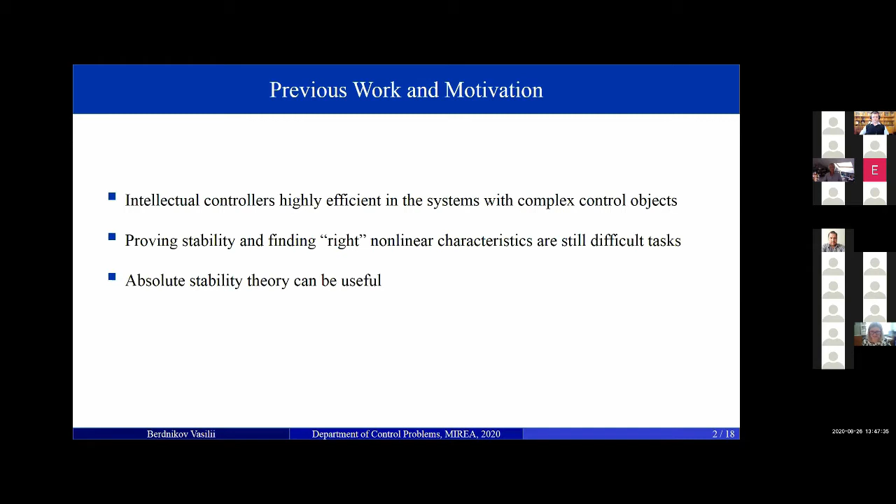However, proving stability and finding parameters in such controllers are still difficult tasks, especially when we talk about parametric disturbance objects, where we can only determine the range of change, but not the exact flow. In this regard, absolute stability theory can be very useful. On the one hand, we can deal with parametric disturbance, and on the other hand, we can find the stability sectors in which we must place our nonlinear characteristics of the intelligent controller.

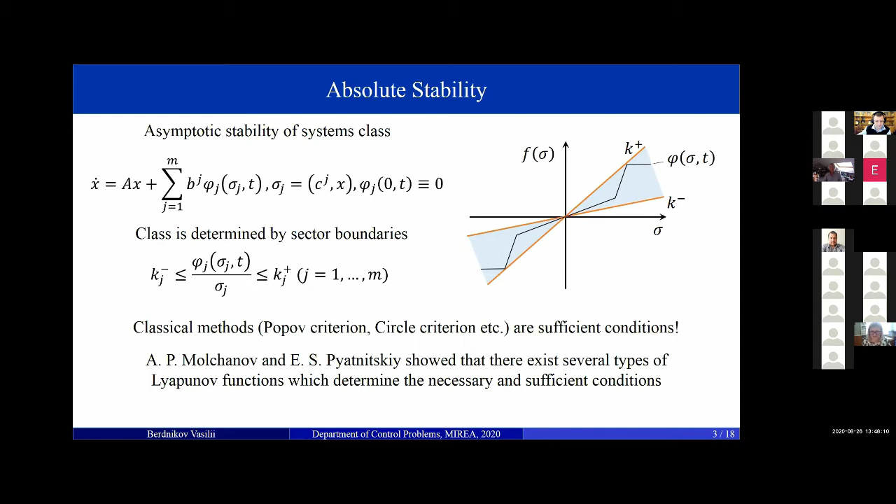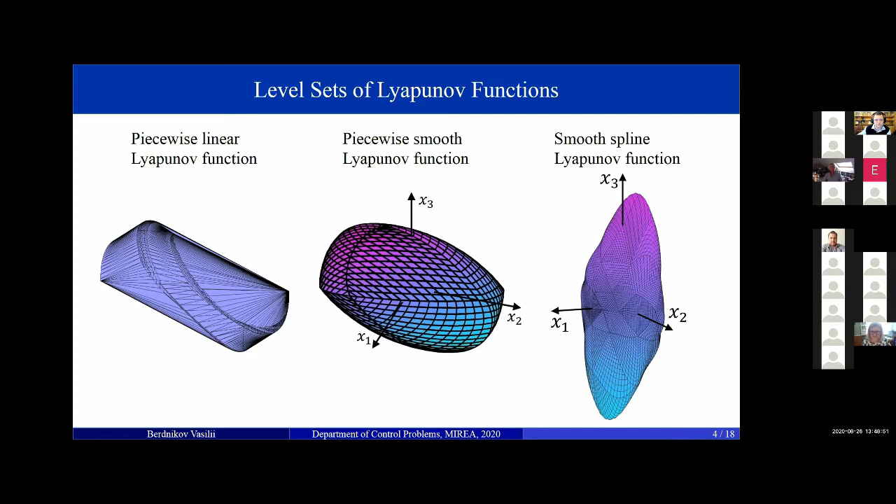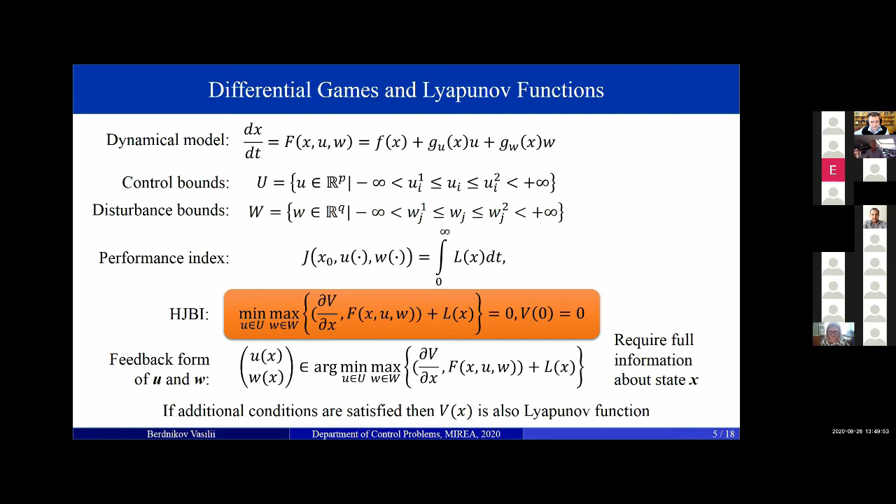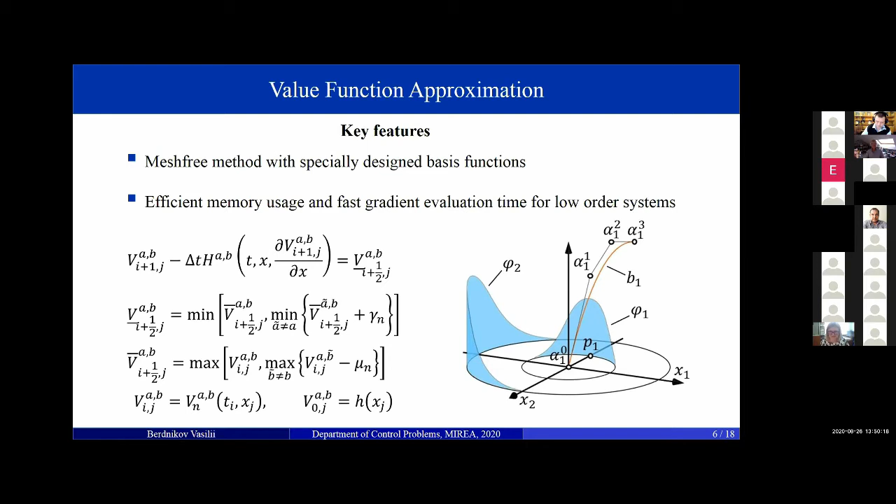That's why we decided to provide our own algorithm of value function approximation. I don't want to go deep inside formulas and backgrounds. I will just note some main features. It is a mesh-free method with specially designed basis functions, and it has efficient memory usage and fast gradient evaluation time for the system, which is very important in real-time applications. So now we can move on.

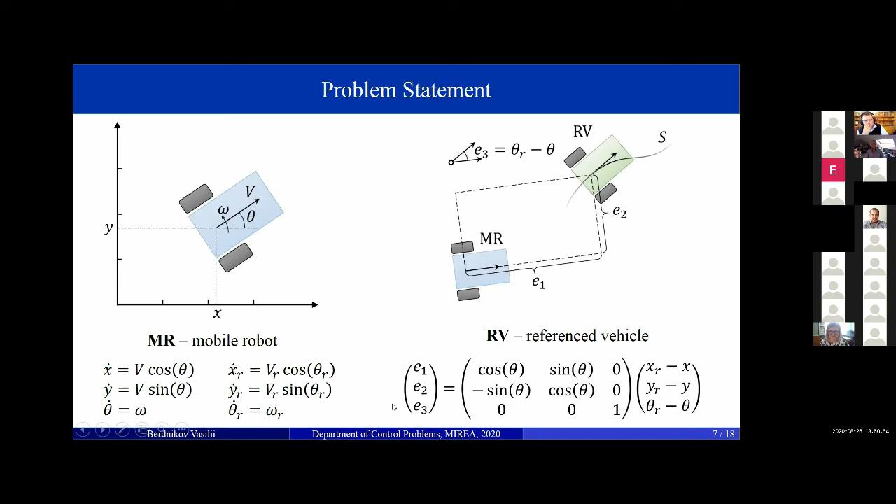In our work, we consider one problem of trajectory tracking, where a reference vehicle implements the ideal movement along some desired trajectory, and the mobile robot tries to minimize the deviation from this movement. On this first stage, we take a very simple model to provide general ideas, and here's the definition of the error vector. After simple calculation, we can show that there exist stabilizing control laws U, assuming that linear and rotation speed are not equal to 0.

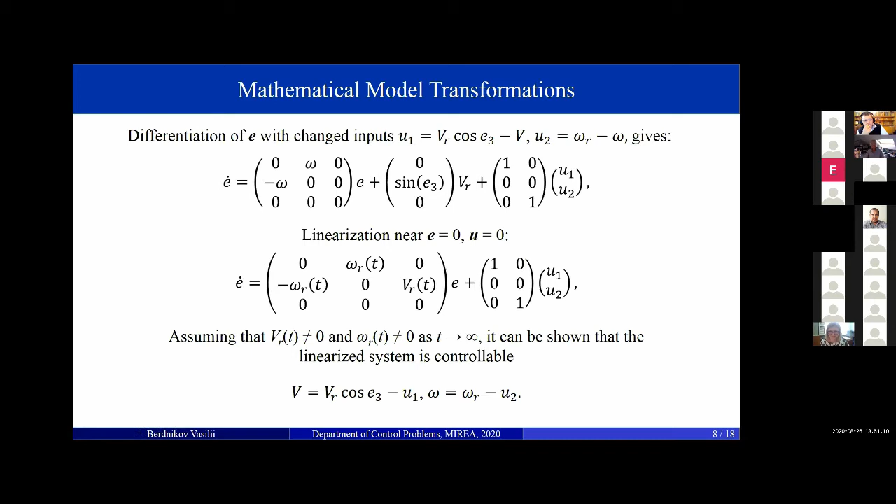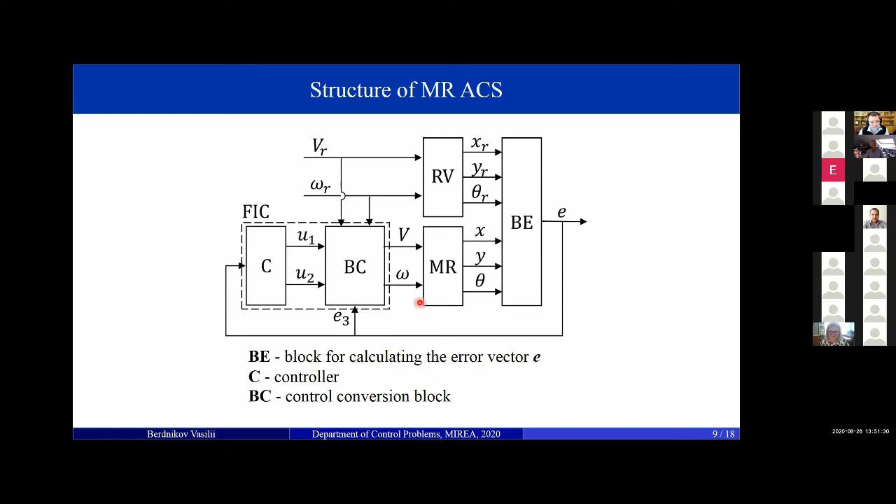Here is the structure of the automatic control system. These blocks compute error vectors, and this is a full information controller, which consists of two parts, the controller itself and the conversion block. And one common way is to choose the control law in the next form.

Instead, we introduce our method. The main idea is that rather than finding the concrete parameters and coefficients, we will determine the boundaries in which coefficients can change. So at this moment, we will think about k as a function of error vector E. And to find concrete nonlinear characteristics, we will use the value function approximation.

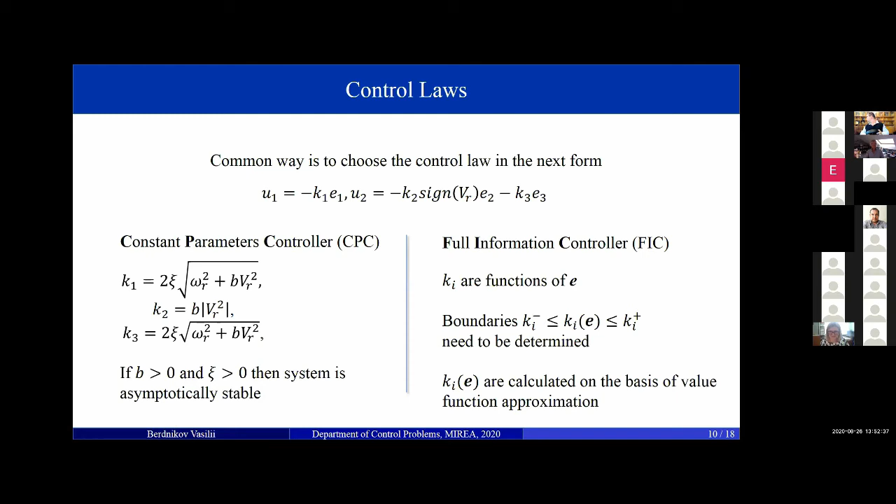Let's look at the results. Here the trajectories of mobile robots with different controllers are presented. RV is a vehicle moving in a circle counterclockwise, and it is clearly seen that the FIC controller gives a better performance in comparison with the constant parameter controller. It hasn't such oscillation and only a little overshooting right here.

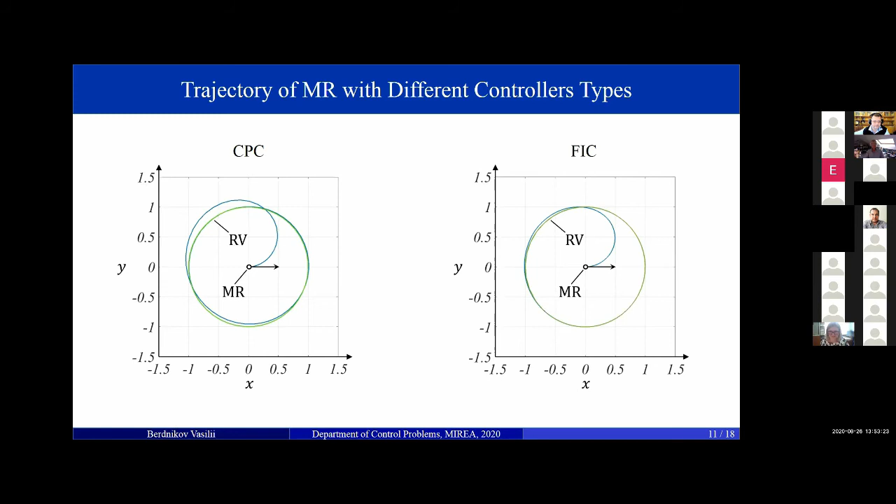And CPC has large overshooting and oscillation long around the trajectory. The same situation can also be seen on the transit process. The FIC controller is about 2 times faster and has no oscillation. In the lower left corner, we give some data about tested controllers.

For CPC, it seems like it's a compromise between speed and quality, and a little bit lower, we show the data of the FIC controller, the boundaries of coefficients. And the last step of synthesizing nonlinear coefficients is to choose the integral criteria. We use common quadratic form, and again on the right, the advantages of FIC are clearly seen.

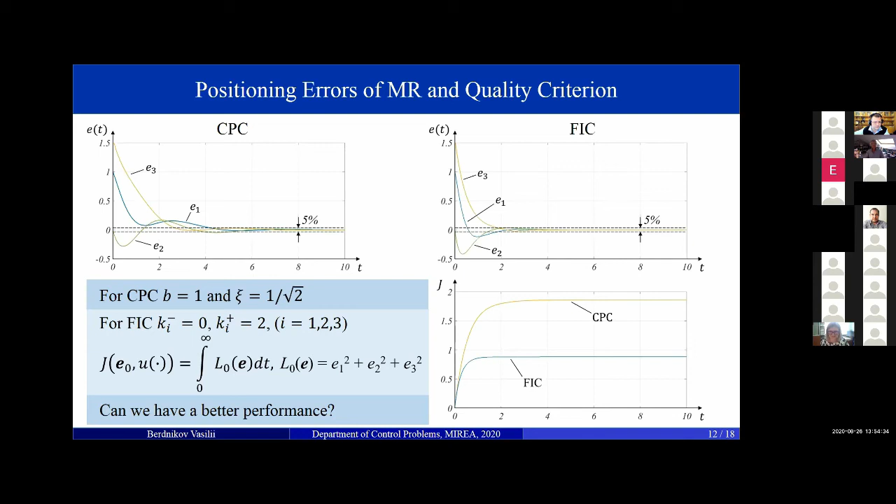It must be noted that synthesized characteristics are optimal, so we can't find a better one without changing the integral criteria. But we still have a question: can we have a better performance in terms of overshooting, speed, and oscillation? And the answer is yes. We can change integral criteria.

The next slide provides a comparison of 4 different integrands. The first one is unchanged, and the next 3 have significantly bigger influence of the corresponding components. So, for example, L2 has domination of the second component, and L3 has domination of the third component.

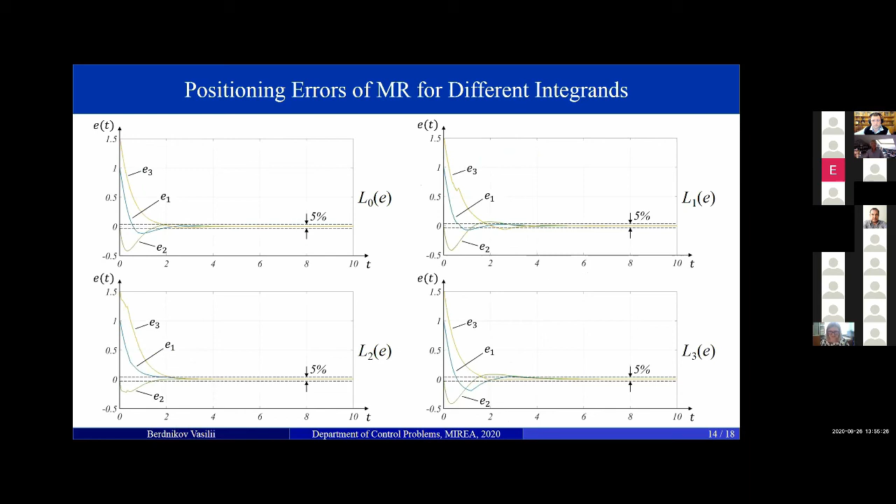We can see that from all figures, L2 has the best performance with no oscillation and overshooting at all. The next slide proves this. We can clearly see the performance in the lower left transit process. Here we present the nonlinear characteristics of the FIC controller, and since it depends on all 3 components, we use slices to show it.

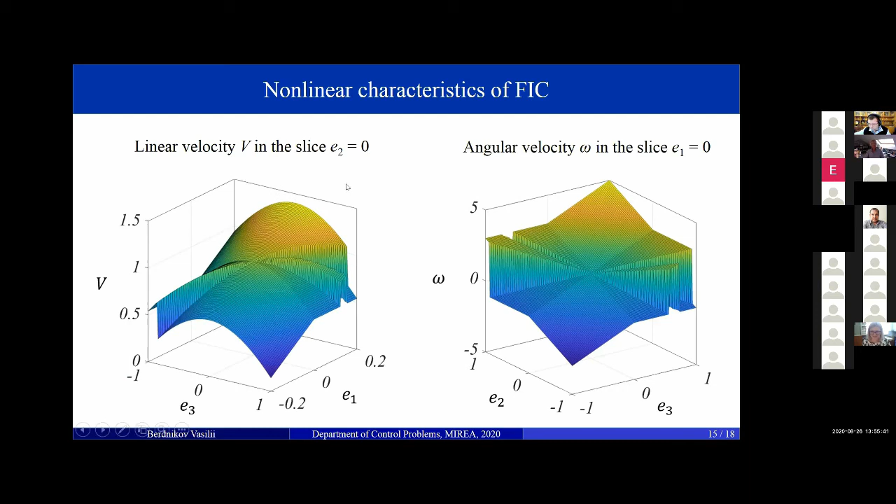At the end, I want to present you the general scheme of our method. So first of all, we determine the math model of the control object. The next step is to choose the control system structure. Then we need to find the lower and upper boundaries of control system coefficients. After that, it is necessary to choose the integral criterion.

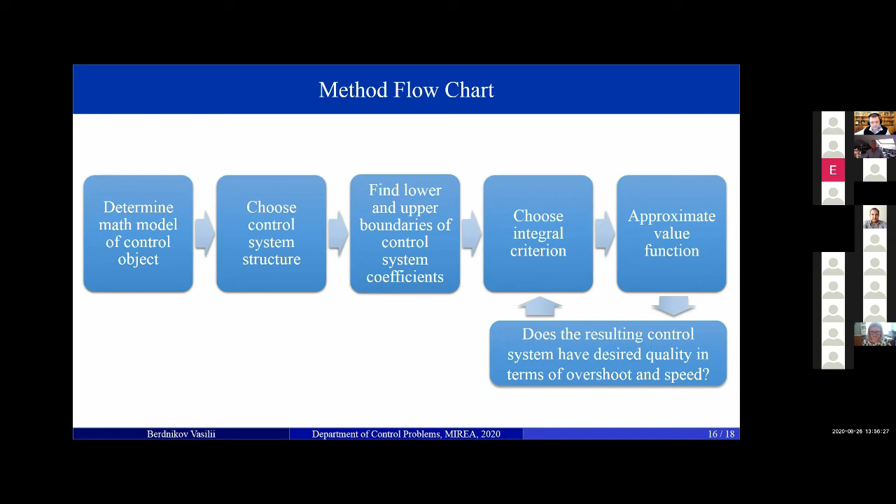And with all this information, we approximate the value function. Finally, if the resulting control is good enough, we stop, and if it is not, we try to change the integral criteria and repeat further steps.

Of course, like any other method, this one also has its advantages and disadvantages. Our method is easy to implement and can improve an already existing control system. It's also computationally efficient for lower-dimensional systems. On the other hand, this kind of method is not curse of dimensionality free, and there is no, of course, open source software available.

Future works will be focused on more complex mobile robot mathematical models and their physical realization, and also implementation of parallelization, and maybe some sparse grid methods can help to avoid drawbacks of the curse of dimensionality. So that brings us to the end of the presentation.